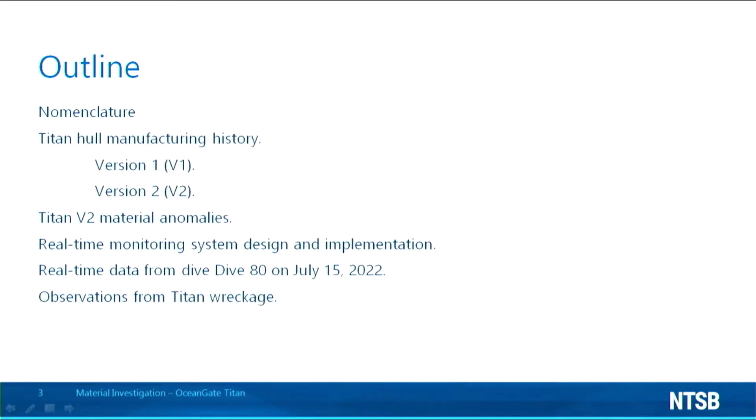Today I'm going to present some results of the materials group investigation into the implosion of the OceanGate submersible Titan. After some nomenclature, the presentation will be broadly divided into two parts. In the first part, I will describe what we have learned about the construction of the Titan's composite hull and the implementation of its real-time monitoring system.

I'll briefly discuss the version 1 hull, then move on to the second, or V2 hull. This hull was manufactured using a multi-step co-bonding process that was different than the V1 hull in that it contains multiple adhesive bonded joints. We were able to examine some material from the manufacturing of the V2 hull, and found several anomalies within the composite and the adhesive joints, including waviness, wrinkles, porosity, and voids. I'll show examples of those as well as some features consistent with rubbing damage at one of those adhesive joints.

Next, I'll recap the Titan's real-time monitoring system. I'll talk briefly about the principles behind these methods and review how OceanGate implemented them on Titan.

The second part of my presentation will focus on changes in the mechanical response of the hull following dive 80, and observations gathered from images of the wreckage on the ocean floor. I'll show that the Titan's real-time monitoring system detected the loud bang that we've heard about previously, and that the strain response of the hull changed on subsequent dives after the bang.

I'll finish with some images from the Titan wreckage. These will show that the composite hull experienced substantial delaminations at or adjacent to two of the hull's co-bonded joints.

Here's an example of a pre-preg splitting operation. This is a comparatively small machine and would probably not have been sufficient for the amount of fiber that OceanGate needed for Titan, but it illustrates the idea of splitting.

A rolled up sheet of prepreg is loaded into the machine and is sent through a series of cutters, producing a large number of tapes or tows. The tows are then rewound onto individual spools. One of these individual tows could contain thousands or even tens of thousands of individual carbon fibers, depending on its width and thickness.

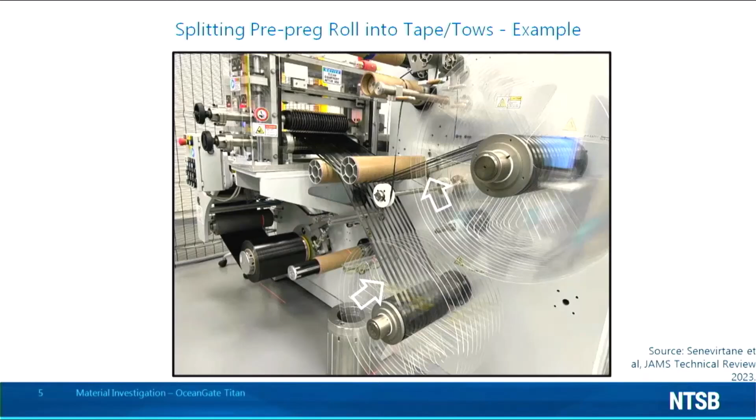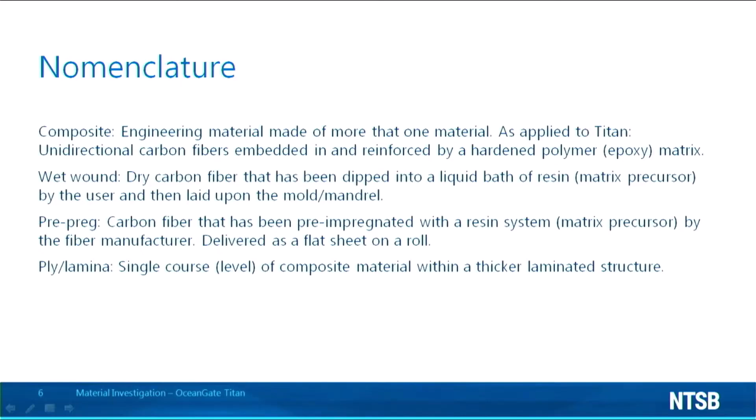The prepreg tapes that we saw in the previous slide are clearly very thin, so objects built up using layers and layers of these tapes will have a laminated structure. One course or level of unidirectional material is a ply or lamina.

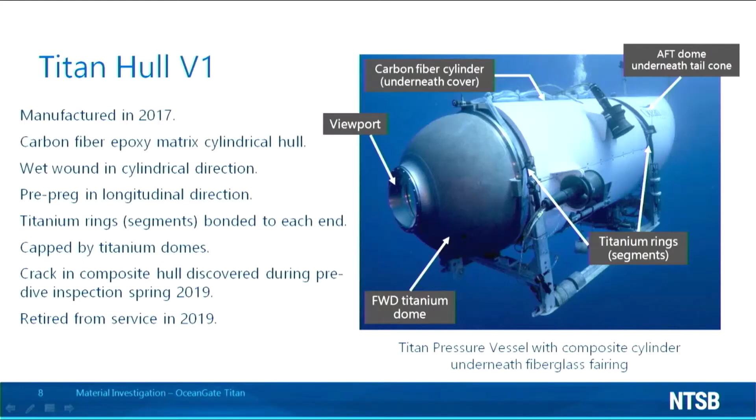I'll now discuss the manufacturing of Titan's composite hull. The Titan V1 cylindrical composite hull was manufactured in 2017 and was at the core of the Titan pressure vessel. The hull was manufactured using a combination of wet wound fiber for the circumferential plies and prepreg for the longitudinal plies.

The ends of the cylindrical hull were capped by titanium rings called segments that were glued to each end. The segments in turn were mated to hemispherical titanium domes that were bolted on at either end, and the forward dome contained the affordance for the viewport. As previously noted, a crack was discovered in the composite hull and it was retired from service in 2019.

Oh, too loud. Okay, all right.

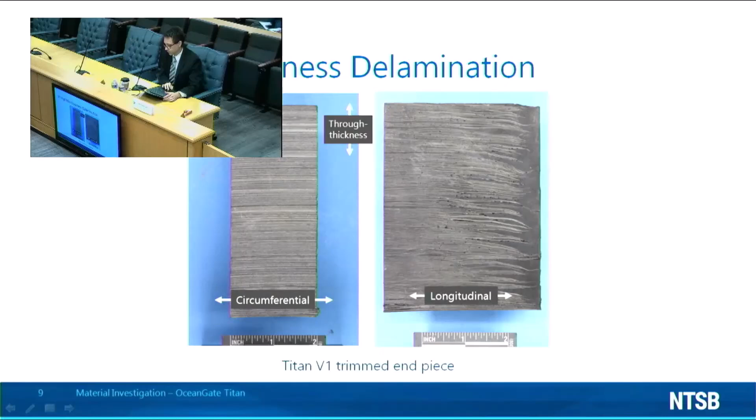Investigators had the opportunity to examine a leftover piece of the Titan V1 hull. The hull was originally manufactured with excess material at both ends, and then trimmed to size. The leftover piece was trimmed excess material from one of those ends.

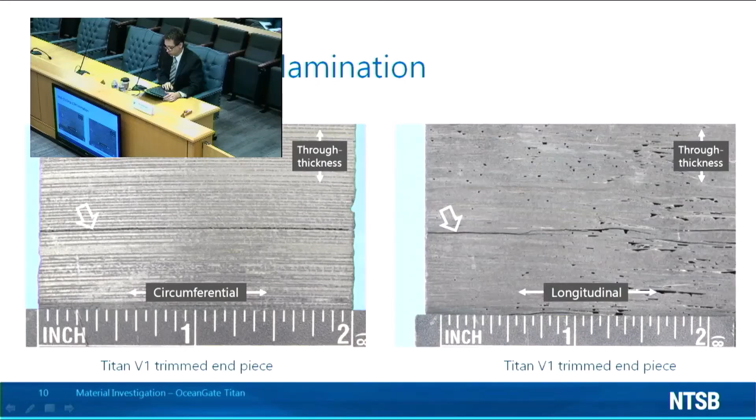The piece contained voids and delaminations. One notable delamination was located about mid-thickness and is shown from different directions in these two images, as indicated by the white arrows.

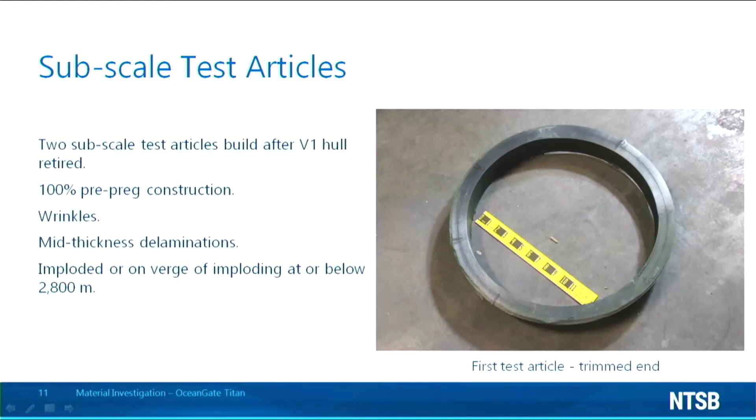After OceanGate retired the V1 hull, they manufactured two 1/3 scale test articles. Just like the Titan V1 hull, those cylinders were manufactured with extra material on both ends, and then trimmed to size. One of those trimmed end pieces is shown in this image, and in greater detail in these images.

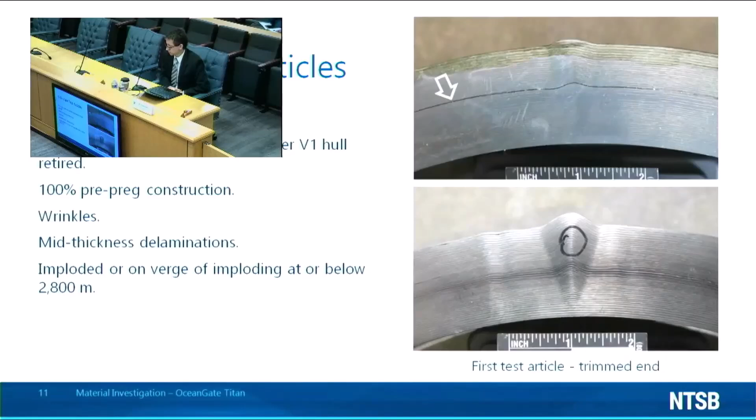The trimmed end piece contained two notable wrinkles and a mid-thickness delamination, as indicated by the arrow in the upper image. According to multiple former directors of engineering for OceanGate, both subscale test articles imploded, or were on the verge of imploding, at or below 2,800 meters.

OceanGate identified these wrinkles as a likely cause of the low implosion pressure. In order to mitigate the wrinkle problem, OceanGate pursued a co-bonding process, which I'll describe in a couple of slides.

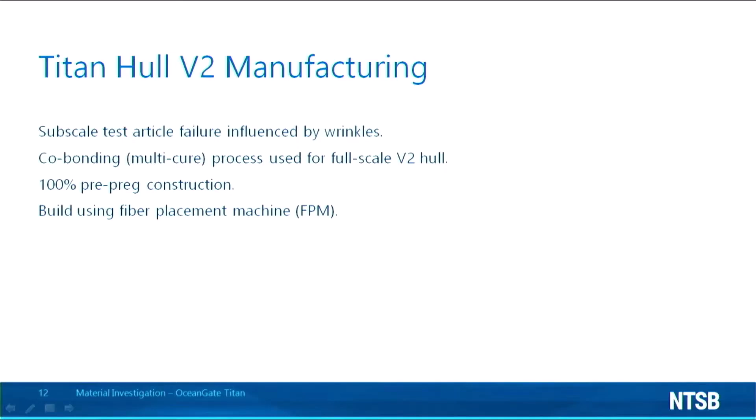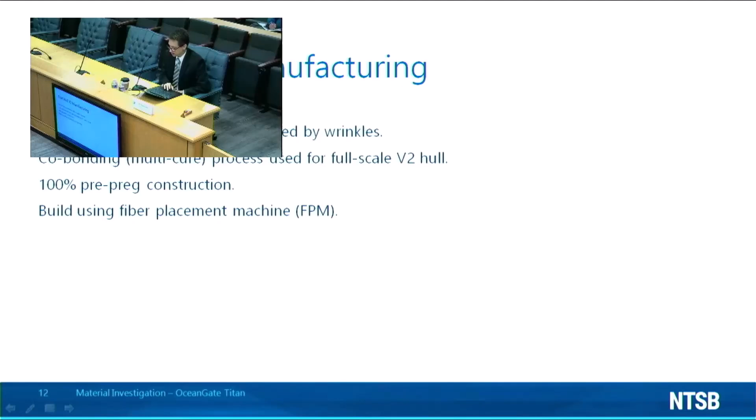After building a couple of test rings to test the viability of the co-bonding process, OceanGate proceeded with building a full-scale version 2 hull for Titan.

The full-scale V2 hull was manufactured by automatic fiber placement. This is a robotic system that, in this case, was probably attached to an overhead rail and trolley system, and contained multiple spools of prepreg tape loaded into a fiber placement head. The head can apply multiple tapes in multiple directions.

For the first two plies, the tapes were applied in the circumferential direction, like a spiral from one end of the hull to the other. For the third ply, the tapes were applied in the longitudinal direction. The sequence was then repeated until 133 plies, approximately 1 inch of prepreg material, had been applied to the hull.

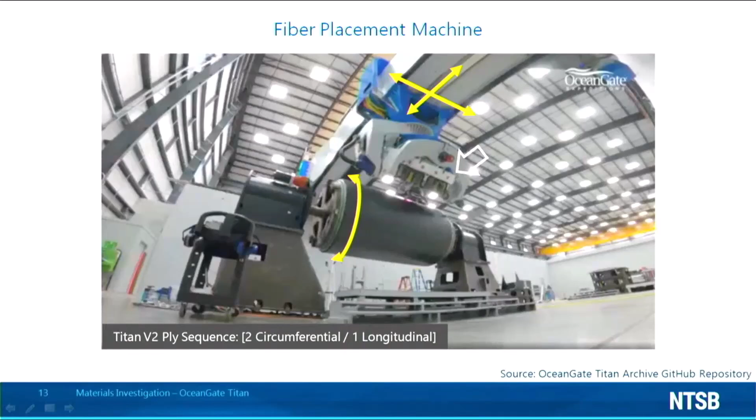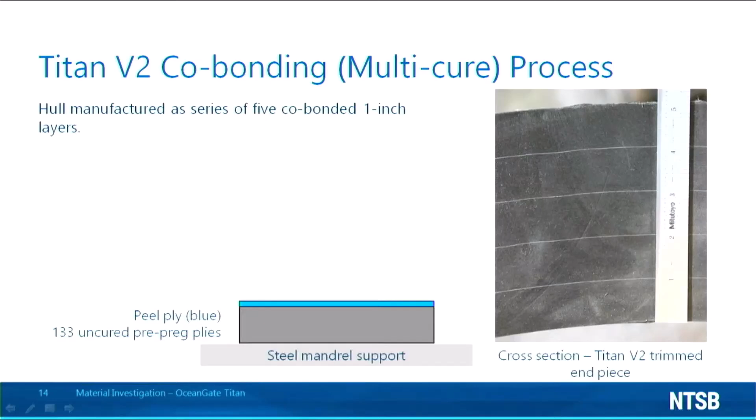The hull then proceeded to curing and co-bonding. The co-bonding process, or multi-cure process, as it was sometimes referred to by OceanGate, involved building up the composite hull in 1-inch layer increments. After the first inch of prepreg was applied, the layer was capped by a peel ply, a plain woven synthetic fabric designed to be removed later.

The assembly was then cured at elevated temperature and pressure in an autoclave. After curing, the peel ply was stripped from the surface. The act of stripping the peel ply is intended to create an active surface for adhesive bonding. After peel ply removal, bulges in the hull were removed by grinding.

A layer of film adhesive was applied, followed by another inch of prepreg, capped once again by a peel ply. The assembly was once again sent to the autoclave for curing. This process was repeated until a nominally 5-inch thick hull was produced.

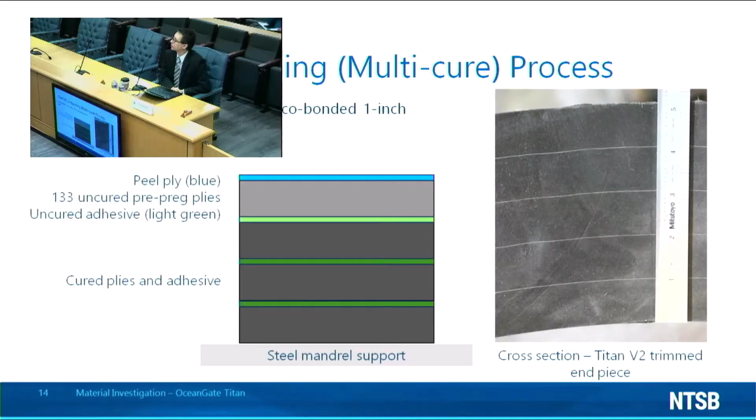The image on the right shows a cross-section through a trimmed end piece of the hull. The lighter lines spaced about an inch apart are the layers of film adhesive used to join the carbon fiber composite layers.

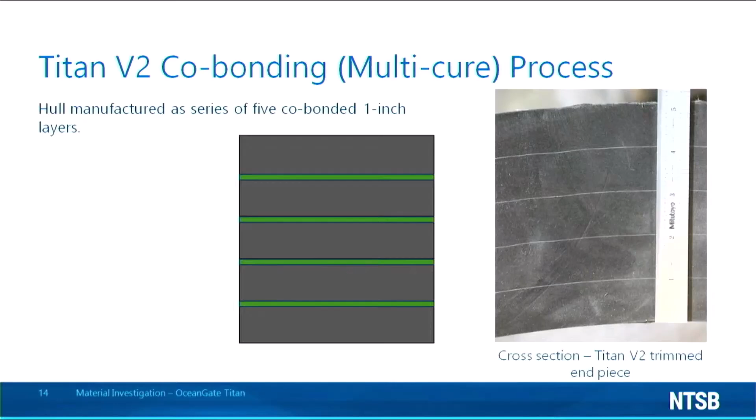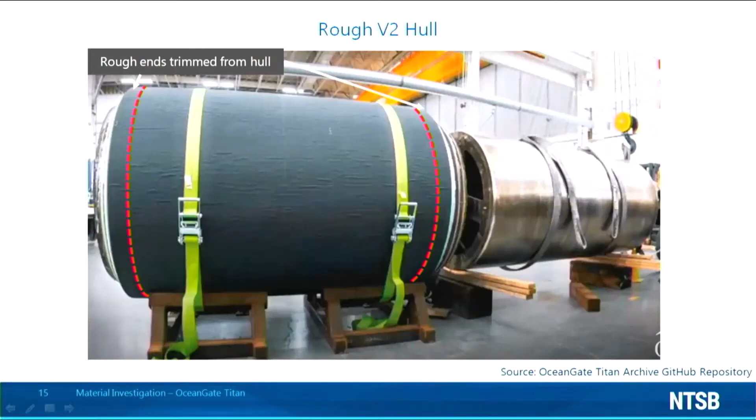This image shows the rough V2 hull upon completion. The rough hull was manufactured with excess material at either end, which was subsequently trimmed off.

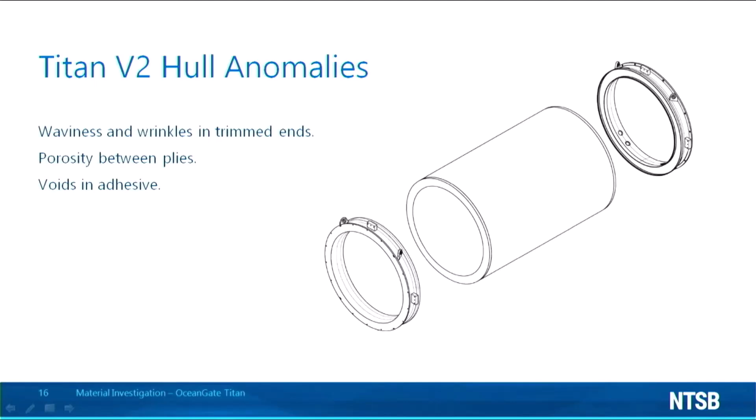The materials group examined trimmed end pieces and a recovered piece of the V2 hull, and found waviness, wrinkles, and porosity within the composite layers, and voids within the adhesive that joined the layers.

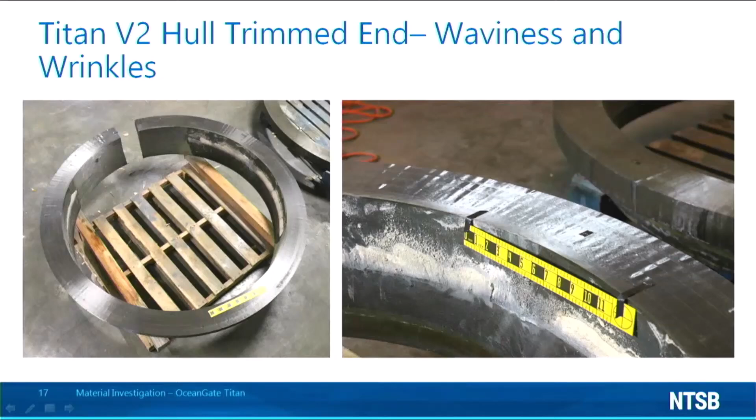The oblique lighting reflects off of the composite plies based on their orientation. The periodic light-dark reflections are an indication of the waviness of the layered structure.

A thorough examination of one of the trimmed ends indicated that the number of ground wrinkles increased with each successive layer, peaking at 24 for the 4th layer. No grinding was performed on layer 5, as it was the last layer.

It should be noted that the number of plies removed by grinding varied significantly. In a survey on a block of material brought back to the lab, the number of plies removed by grinding varied from 1 to 12.

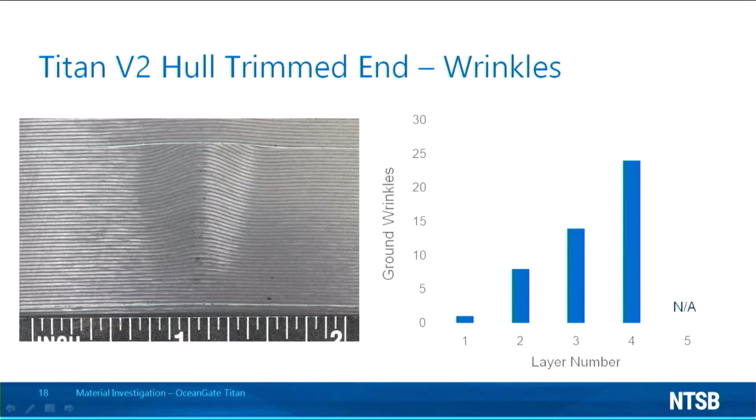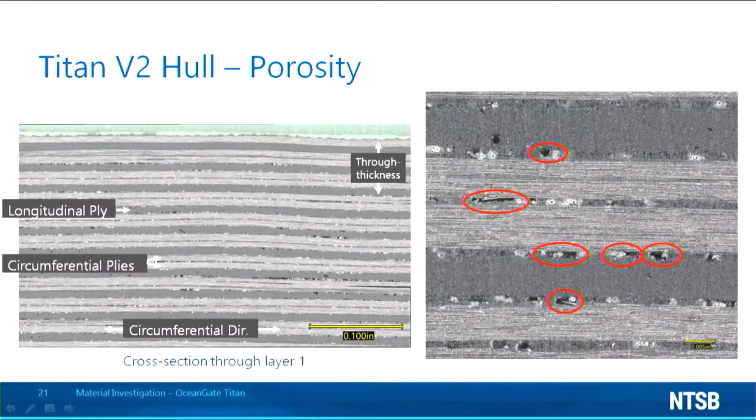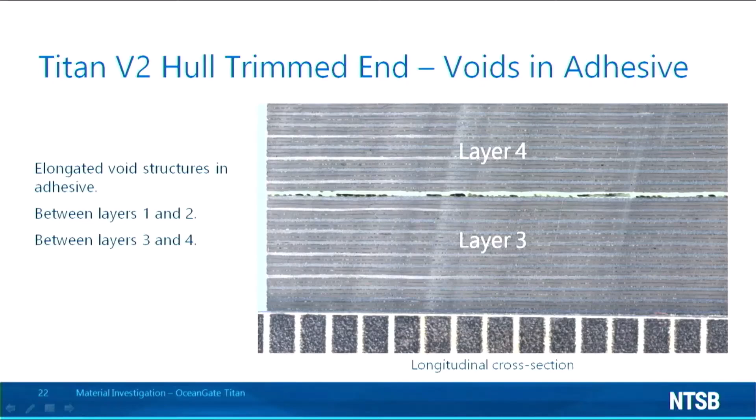Finally, investigators observed voids in the adhesive used to join the co-bonded layers. Some voids were present in all layers. However, at the interface between the 1st and 2nd layers and between the 3rd and 4th layers, some of the voids formed elongated structures in the adhesive. These structures were visible on longitudinal cross-sections like the one shown.

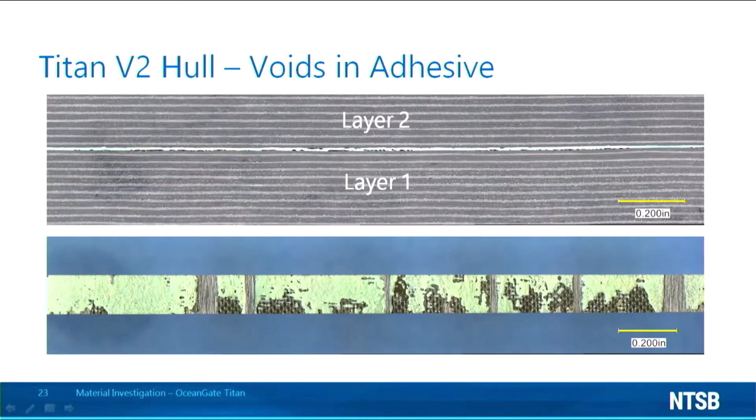Three distinct regions were seen on the fracture surface. The green regions are fractured adhesive. The vertical linear features are fractures through the carbon fiber composite. The checkerboard-like regions are thin layers of hardened epoxy that are above the carbon fiber composite but beneath the adhesive. The checkerboard patterns were left behind by the peel ply that was used during the curing process and then subsequently removed. The areas where you see this pattern were associated with the voids.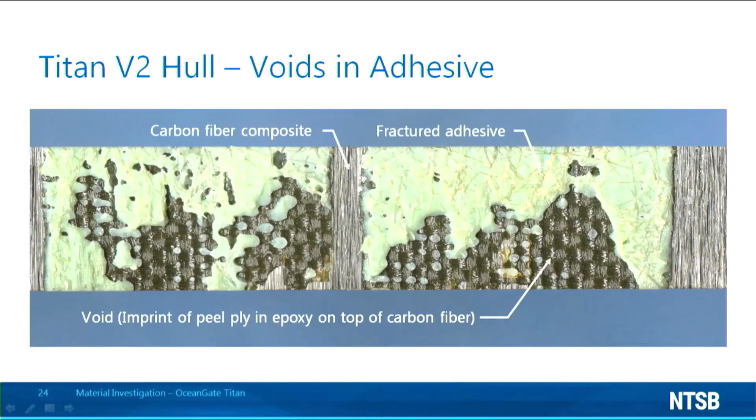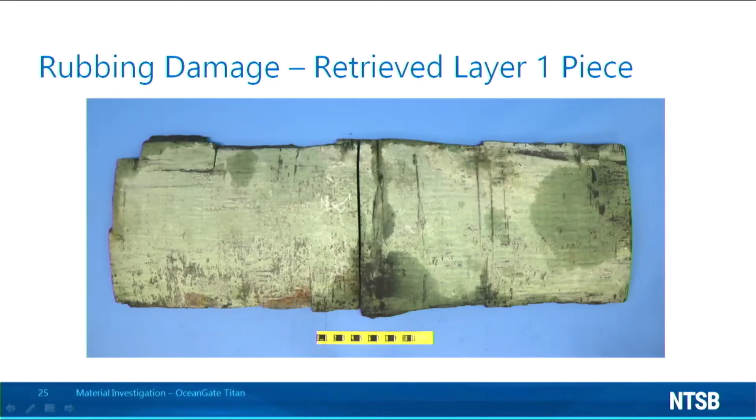Examination of the retrieved single-layer hull piece also revealed features that were consistent with rubbing damage on the adhesive surface. Voids were observed on the surface of the piece, like those observed on the trimmed end. As shown in the images above, some of these voids contained cream-colored debris that was readily removed with the tip of a fine blade and a synthetic bristle brush.

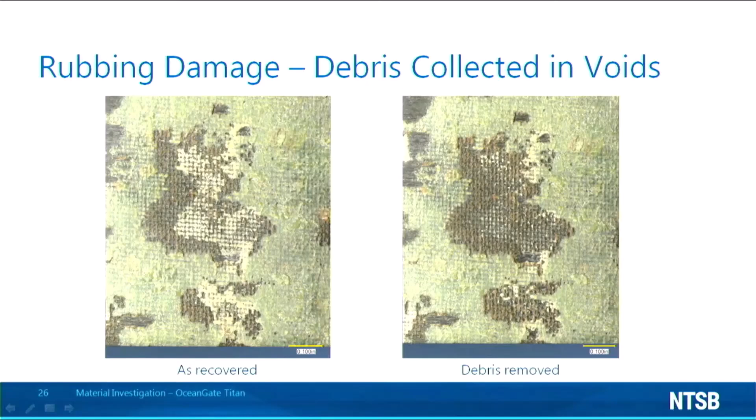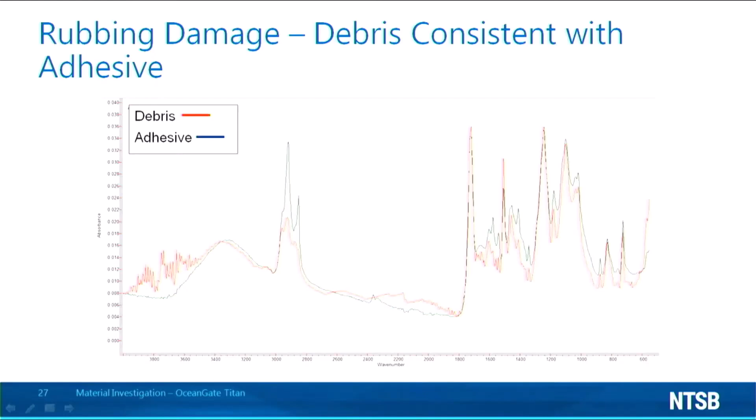Next, I'll discuss the components of Titan's real-time monitoring system. This system comprised two sensor types. The first type was acoustic event detection, and the second was the monitoring of mechanical strain or deformation. I'll start by discussing the acoustic monitoring system.

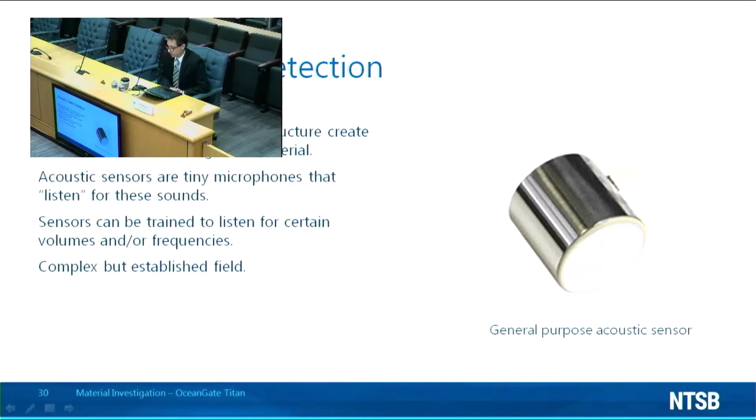The Titan's acoustic monitoring system functioned on the principle that fractures and other forms of material damage create sound waves. These sound waves can be detected using acoustic sensors. These sensors are just tiny microphones that can be affixed to a surface and trained to listen for sounds associated with breakdown of the material. This is a complex but established field of engineering.

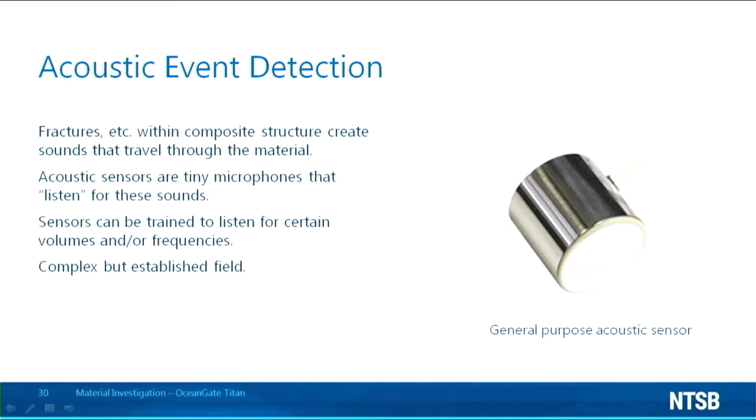The Titan's acoustic monitoring system comprised 8 sensors, with 7 attached to the inner surface of the hull and 1 attached to the inner surface of the aft titanium segment. On the hull, 2 were located at the forward end, 3 were in the middle, and 2 were at the aft end.

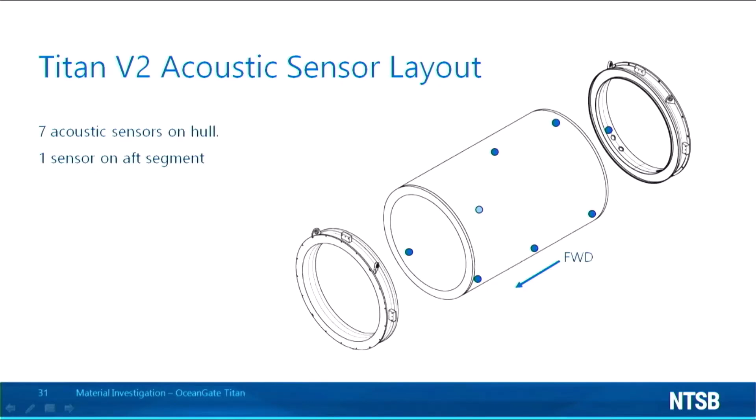The system listened for acoustic events that exceeded a predetermined amplitude, and when it detected one, it counted it as a hit and added it to a running tally of the total number of hits. There were 2 thresholds for the number of hits. The first threshold issued a yellow alert, and the second issued a red warning, at which point the dive was to be aborted. The amplitude and quantity of hits were established based on acoustic activity from the retired V1 hull and the subscale test articles.

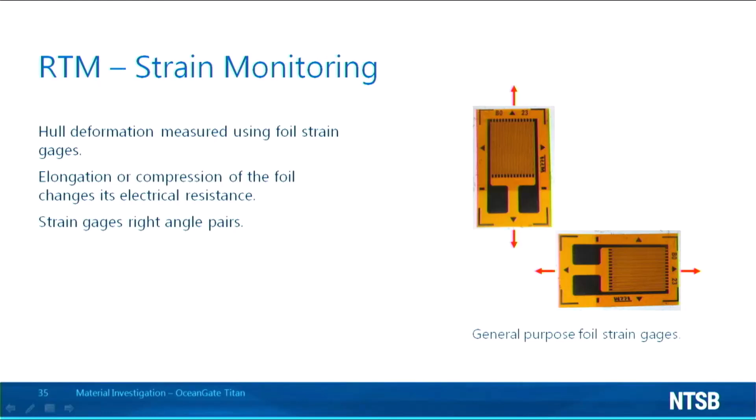There were 8 strain gauge pairs on Titan. 5 gauge pairs were located on the hull, and 1 pair was located on the aft segment. 2 gauge pairs were originally located on the forward dome during testing at the Deep Ocean Test Facility and may have been moved to other locations on the hull. As illustrated by the red arrows on the image, 1 gauge in the pair was aligned in the circumferential direction and measured hoop strain. The other gauge was aligned along the axis of the cylinder and measured longitudinal strain.

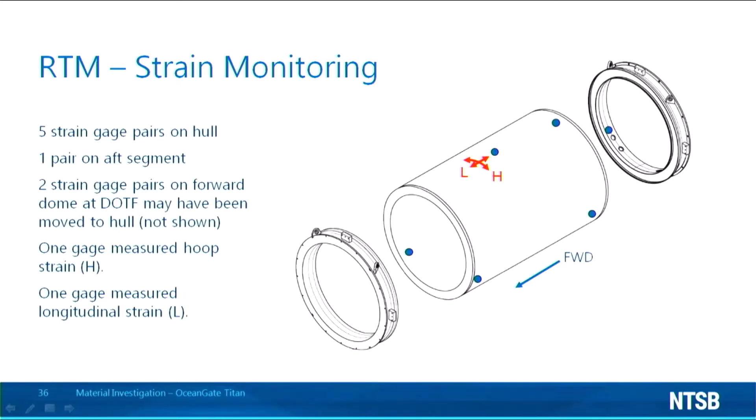On July 15th, 2022, Titan executed a dive to the Titanic, entered into the dive log as dive 80. Upon returning to the surface, the crew heard a loud bang, which was documented by the pilot in the OceanGate dive log and has been discussed at this hearing. This was the 14th dive to a notable depth for Titan V2 since initial deployment and the 6th notable dive of the 2022 expedition. The real-time monitoring system captured this loud bang, and it also captured changes in the hull's strain response after the bang.

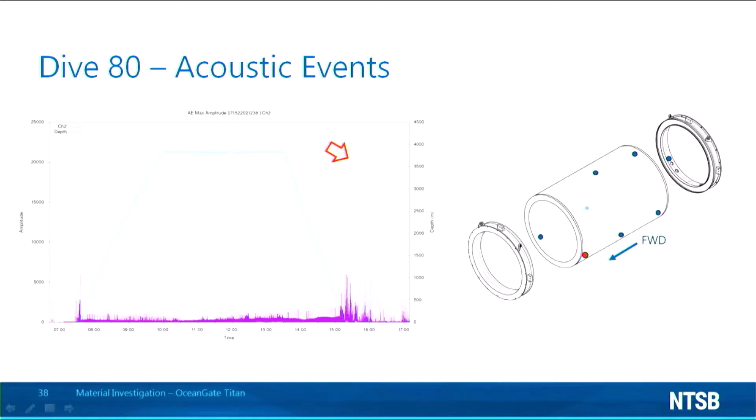The audible event was captured as indicated by the acoustic activity plot on the left. The sensor shown here was located at the forward port side of the hull. The horizontal axis displays time, and the vertical axis, again, displays both acoustic event amplitude and dive depth. The acoustic activity increased upon returning to the surface leading up to the event, which is indicated by the red arrow.

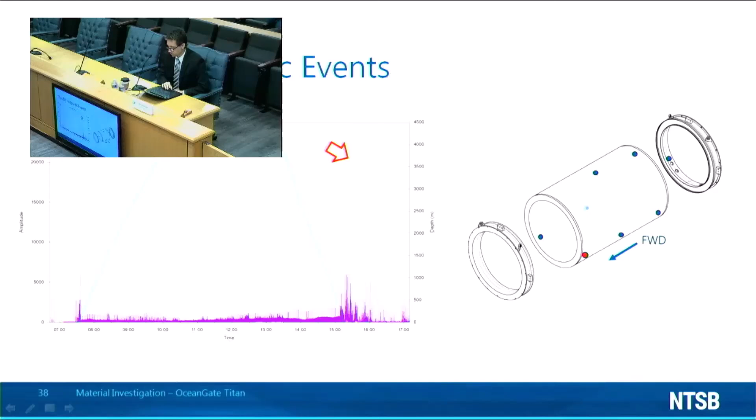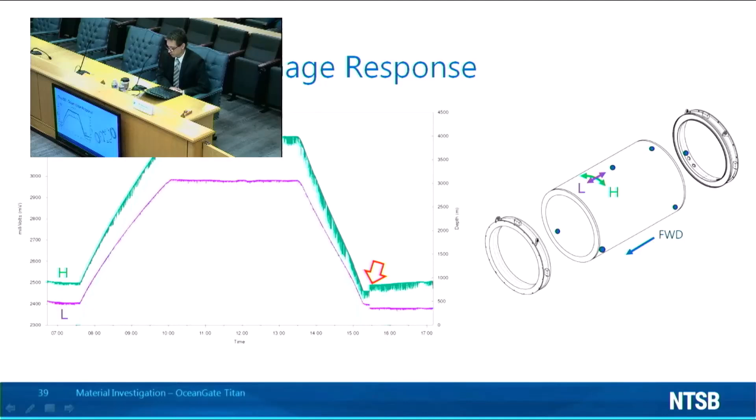Several strain gauges also responded to this event. The graph on the left shows the hoop and longitudinal strain responses during the dive for Group 4. As Titan descended, the gauge outputs increased in response to the external pressure as expected, and during the ascent, the output decreased as expected. Shortly after returning to the surface, the hoop and longitudinal gauges both showed a sudden shift in gauge output as indicated by the red arrow.

Lieutenant Steele, could we go back and try to get back on that page? It looks like it's not loading. Okay, well, we'll just have to proceed, unfortunately.

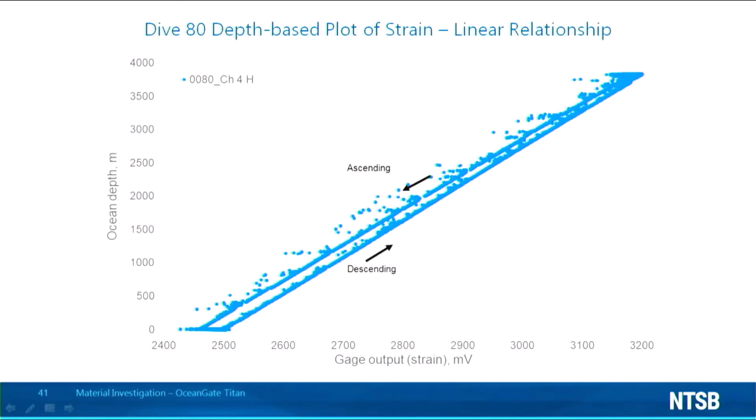All right, thank you. So,

Some of the gauges showed a change in strain response after dive 80. OceanGate strain data was typically, and perhaps always, plotted as a function of time. The changes in mechanical response are easier to visualize by plotting the strain against dive depth, as shown here for the hoop strain at gauge group 4. Plotting the data in this manner is more akin to a stress strain plot, which is a standard way of visualizing this type of data.

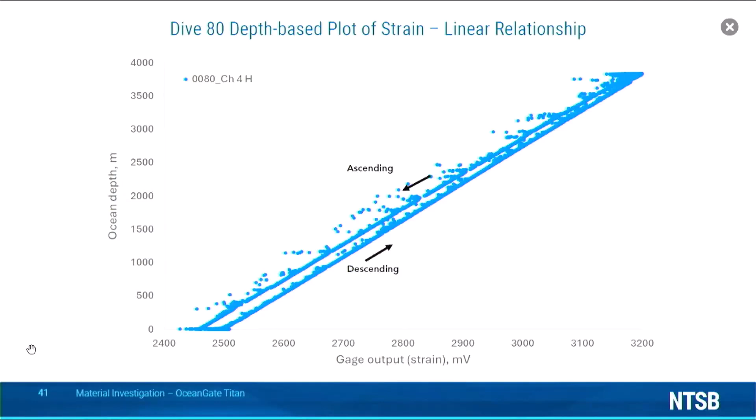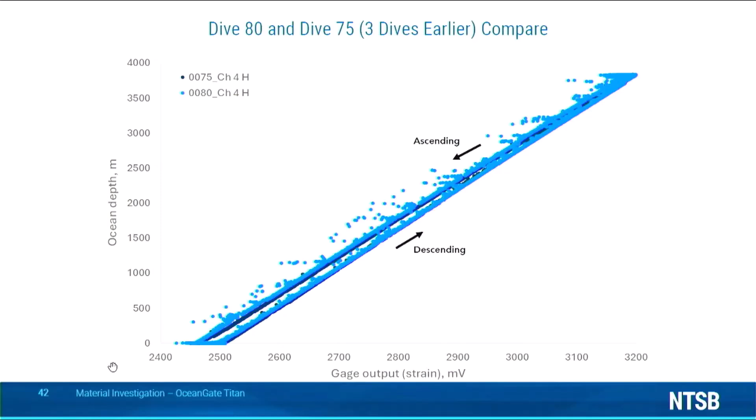For dive 80, prior to the event, the relationship between strain and dive depth was a straight line for both the descent and the ascent. Going backwards in time by 3 dives and comparing dive 80 to an earlier dive 75 reveals no significant change from dive to dive. Moving forward in time and looking at dive 81, the dive immediately after the event, we see a change in the initial strain response of the hull.

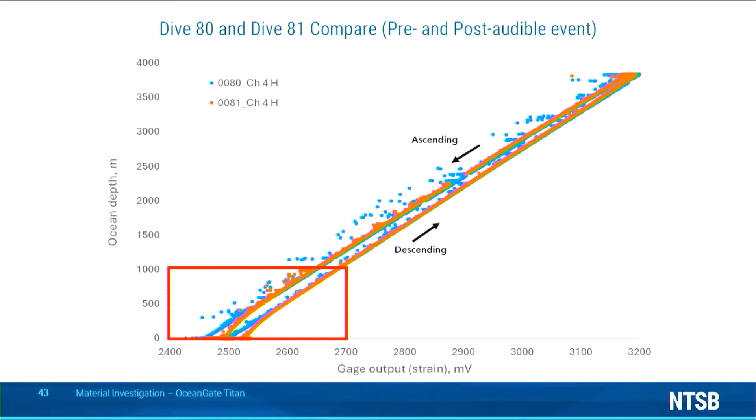Yeah, you can swap back over now.

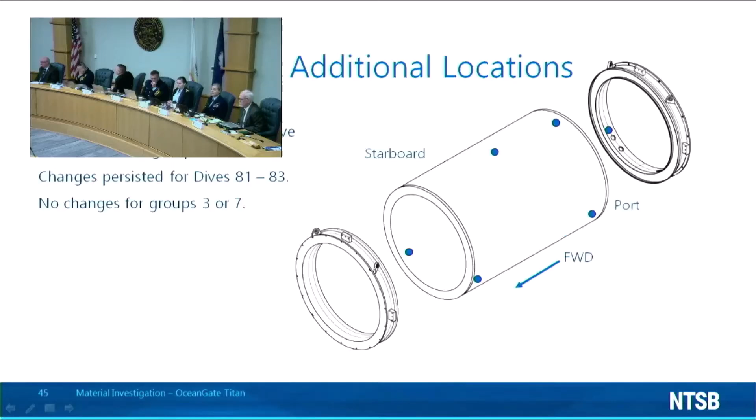So changes in strain response after dive 80 were also seen for the longitudinal strain for gauge group 5, and to a lesser extent for the hoop strain at gauge group 8. Those changes also persisted for dives 82 and 83. There were no apparent changes for groups 3 or 7.

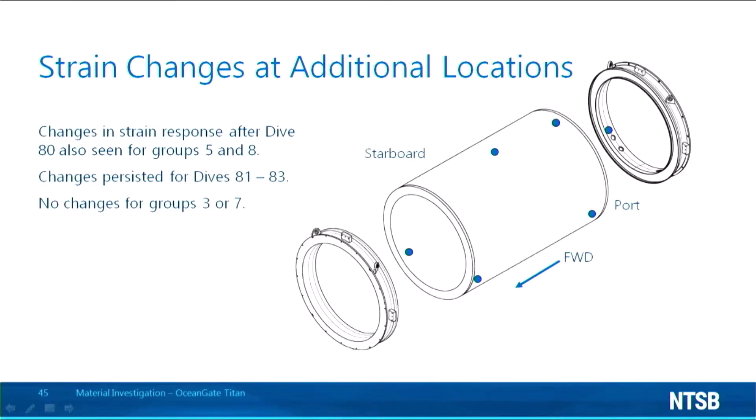Might not be able to do this. Perhaps we should switch over to the PDF version. Agreed, Lieutenant Steele, let's just stick with the PDF.

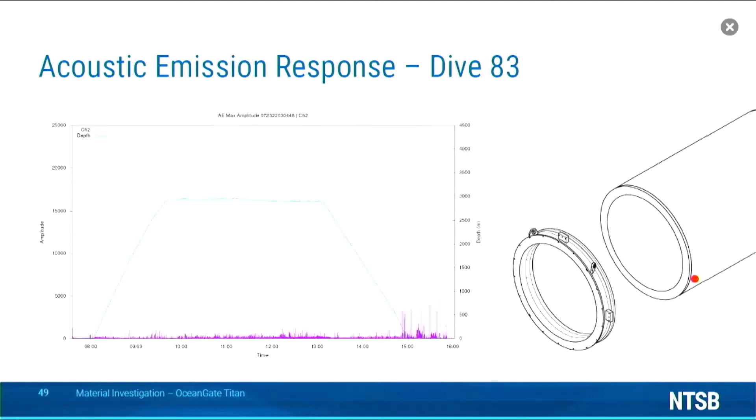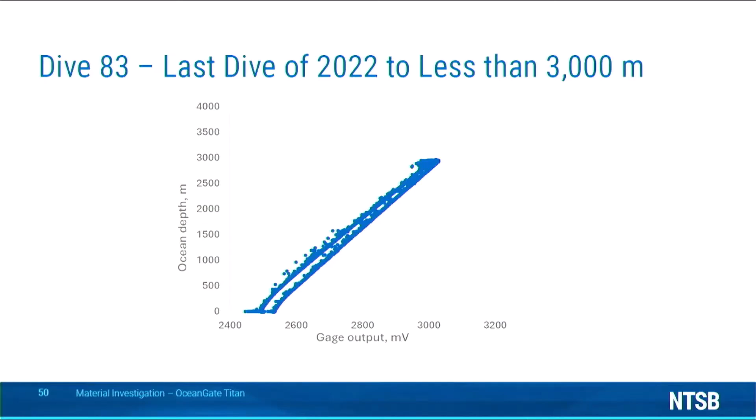Next slide, and here for dive 83. One note about dive 83: this dive did not take place at the Titanic wreck site and did not go to the same depth as the other dives. According to the dive log, it reached a depth of 2,954 meters. This is the last dive for which acoustic emission and strain data is available.

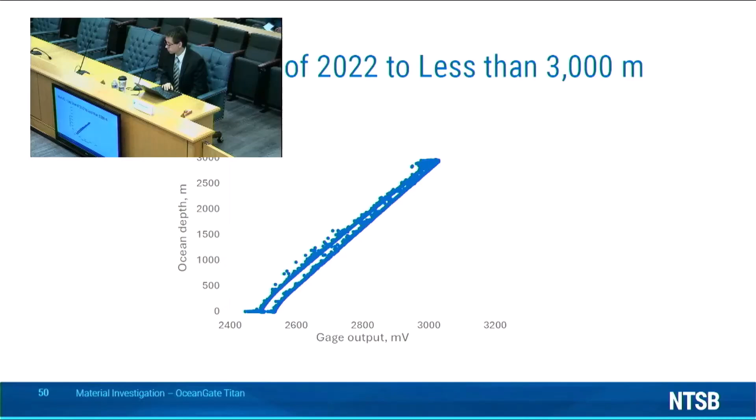For the final part of my presentation, I'll go over some images of the Titan wreckage, where we will see that the hull encountered a significant amount of delamination, the majority of it within or adjacent to co-bonded adhesive interfaces.

Here's another view of the main wreckage. From this view, two notable pieces of the wreckage are visible and indicated. One is the piece that extends nearly the entire length of the hull near the top, and the other is a piece on the port side, as indicated by the white outlines.

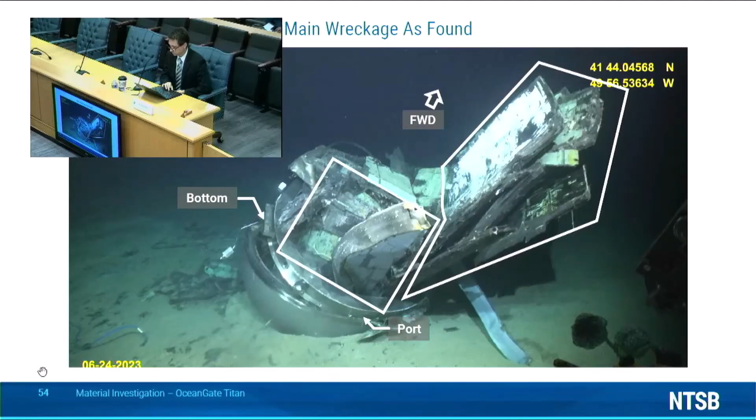The first shell consisted solely of layer 1. The second shell consisted of layers 2 and 3, and finally the outermost shell consisted of layers 4 and 5.

The delamination between the innermost shell and the middle shell—could you please go back, actually, to this side. I'll go ahead and give you a cue for next slide when I'm ready. Okay. No, I kind of lost where. Sorry, I lost where I was.

So the delamination between the innermost shell and the middle shell occurred within the adhesive at the layer 1, layer 2 interface for all the pieces that could be examined.

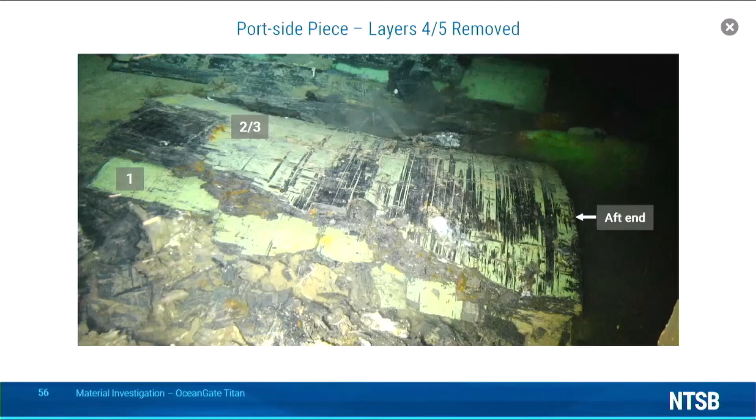Next, okay, good. Looking at this same piece, with the outer shell removed, we see that toward the aft end, there's a mixed region where some of the separation took place within the adhesive and some within the adjoining composite layer. At the forward end, there's also a square patch of composite material still attached to the surface.

Also of note for this piece, the outer shell consisting of layers 4 and 5 was fractured through the layers, and a chunk of it was missing, which is why the top surface of layer 3 is visible. These through-thickness fractures were not found in the middle shell.

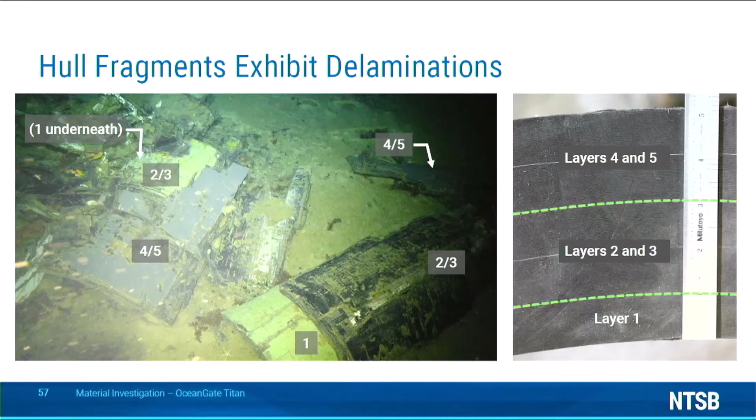From this point of view, the green adhesive at the bonded joint can be seen on the inside of the 4th layer. Delamination features were also observed on other pieces of the hull. Images and descriptions of those pieces are contained within the NTSB factual reports.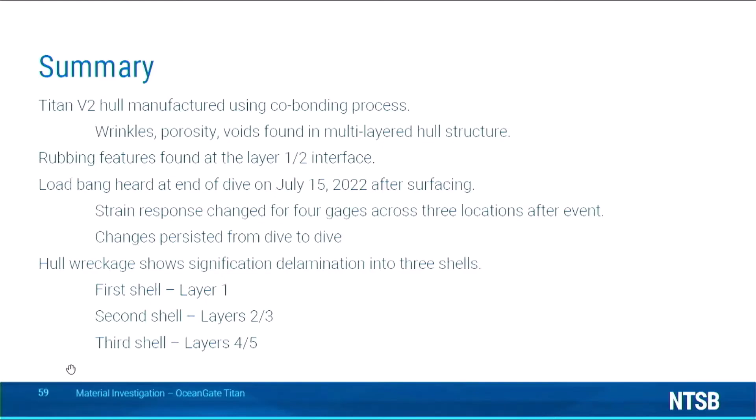So to summarize, the Titan V2 hull was manufactured from pre-preg unidirectional carbon fiber using a co-bonding process with multiple adhesive interfaces. Examination of the hull material revealed waviness, wrinkles, porosity, and voids within the multi-layered structure. A recovered piece of the hull exhibited features consistent with rubbing. Examination of strain gauge data after the dive 80 event showed a change in the mechanical response of the hull for 4 strain gauges across 3 locations of the hull. Those changes persisted from dive to dive. As just described, the composite hull showed significant delamination into 3 shells: a shell comprising layer 1, a shell comprising layers 2 and 3, and a shell comprising layers 4 and 5.

This brings me to the end of my prepared testimony. I would like to thank the Coast Guard for the opportunity to present these findings and would be happy to answer questions at this time.

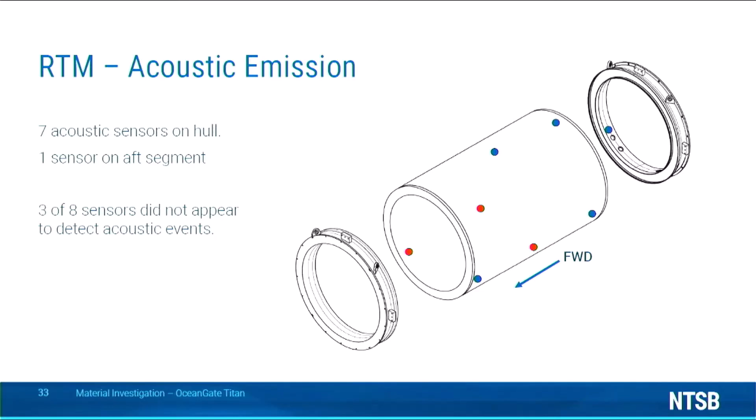Okay, so channel 2 would be right there, at the forward end of the hull on the port side. Channel 4 would be in the middle of the hull at the top. And, sorry, can you remind me again, what was the—In channel 7? Channel 7. I believe this is channel 7. I believe channel 7 is also on the top of the hull at the aft end.

We also noted from the real-time monitoring data that channel 6 and channel 8 had acoustic emissions, but they were not full scale. Can you show me where channel 6 and channel 8 are located on the diagram? Channel 6 would be on the aft titanium segment or ring, and channel 8 would be right here on the lower port side at the aft end of the hull.

Earlier we had discussed that the acoustic emission sensors 1, 3, and 5 had little to no activity. I wanted to confirm that AE sensors 1, 3, and 5 are the ones shown in red on your diagram. That is correct.

In your presentation, you noted that there was dust present in the peel ply impression between layers 1 and 2, which is slides 26 and 27 of your presentation. I wanted to confirm that the test you conducted showed that the dust was consistent with being the same material as the adhesive layer. What slide was that? Slides 26 and 27.

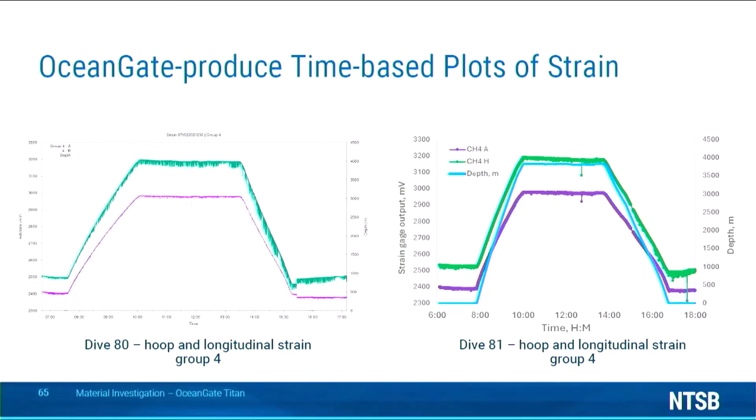This slide shows the hoop and longitudinal strain gauge output for Group 4, for dive 80 and dive 81. The graph on the left is the original OceanGate data as I received it. I did go ahead and replot it for dive 81 because, as Mr. Brooks testified, occasionally their plotting software would produce strange outputs, making it difficult to do a side-by-side comparison. But this is the type of data that, as far as we know, OceanGate was producing, and so these would have been the plots they would have been evaluating.

So I guess it's a matter of opinion as to whether one can discern the changes in strain output from these graphs. Thank you, that concludes my questions.

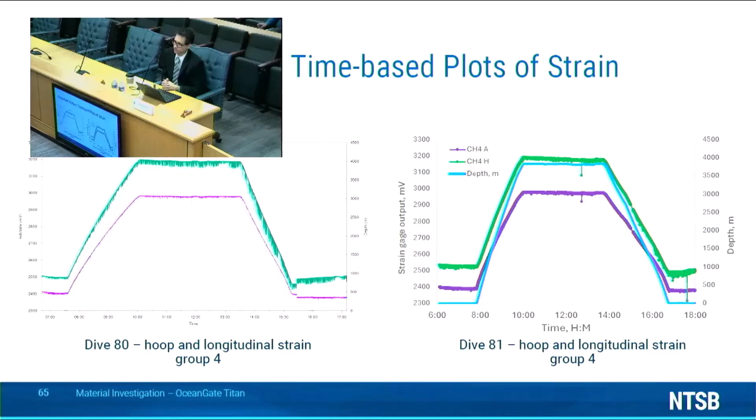Dr. Kramer, Lieutenant Commander Whalen has a question. Thank you, Dr. Kramer. When you measured the thickness of the version 2 hull, the number was approximately 5 point... it's somewhere between 5/32 and 3/16 above the nominal 5-inch thickness.

Did you do the same measurement on the version 1 hull? I did do a thickness measurement on the version 1 hull. And what was that? It was like 4.97, slightly below 5 inches.

Lieutenant Steele, can you bring that up? I do have a slide where I have a visual comparison of those two. That's slide 63.

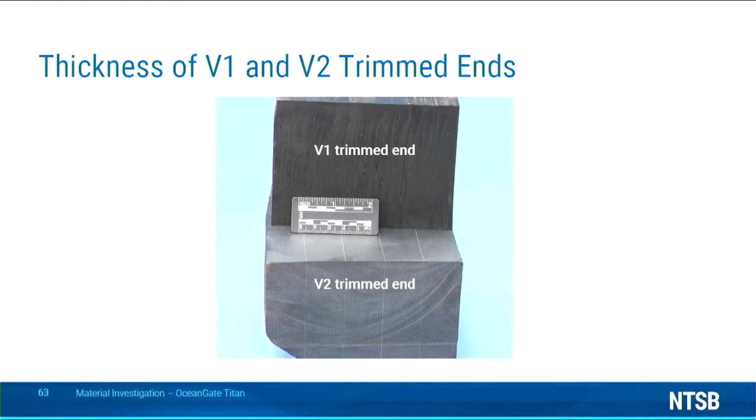This slide here shows a piece of the version 1 and a piece of the version 2 trimmed ends stacked on top of one another, so you can visually see the difference in the thickness of the two hulls.

And that would have been the area of the carbon fiber, not specific to these two as they're trimmed ends, but the width of the carbon fiber visualized here is the same as would be on the trimmed off end, which went into the clevis of the titanium ring. That is correct.

And in fact, we did have a chance to examine the outermost shell, layers 4 and 5 of that very long piece, and we were able to see that the outside of that layer had material removed from it, presumably to bring the thickness down to the level where it could be inserted into the titanium ring. And they were the same titanium rings used on version 1 and version 2? That's correct, that's my understanding.

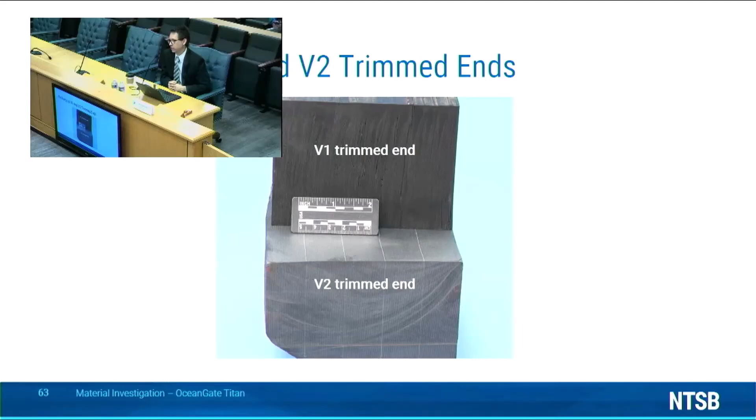That's all the questions I have, sir. Thank you.

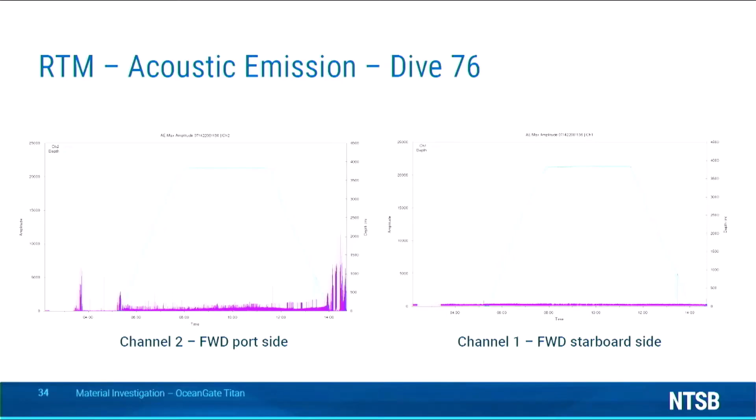Lieutenant Steele, can you bring up slide 34, please? Dr. Kramer, I'm going back to the acoustic emission data from Dive 76. This question comes down to trying to figure out if the acoustic sensors were inoperable or just hearing less noise prior to Dive 80. We had previous testimony that this lesser acoustics could be due to a scaling issue from the different graphs, and that's what I want to ask you, sir.

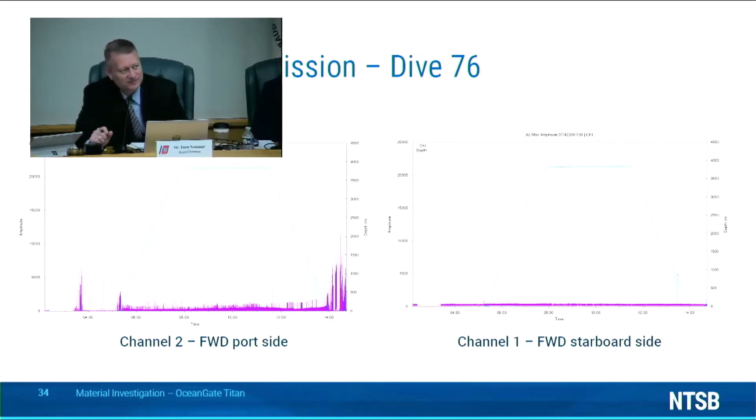Looking at this, is the potential for channel 1 to be a scaling issue? Are these the same scales? Well, these two plots are the same scale.

So in your opinion, is it likely that the other acoustic sensor is either highly degraded or inoperable? I don't think that I'm in a position to answer that question.

For Dive 80, did you see any indications of an acoustic reading on channel 1 for the loud bang? I think it's fair to say that for any dive we examined in 2022, on channels 1, 3, and 5, we did not see any indications of notable acoustic events.

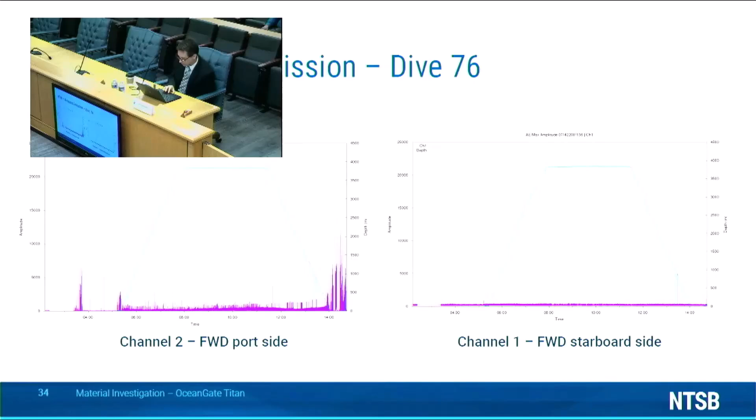There were, as you see on this slide, the right graph, the forward starboard sensor, occasional blips like the one you see, but in general they do not show the same type of acoustic characteristic that the other sensors show.

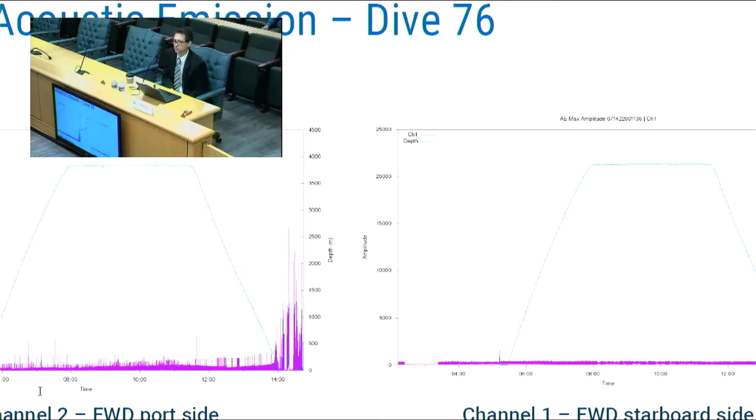And sir, now I'd like to talk about the sanding to fair the hull after each 1-inch layer was applied. Do you know if that sanding was done on carbon fiber layers that were longitudinal or cross-sectional?

Well, for any sanding event that went 3 layers down or more, it would have sanded into both circumferential and longitudinal layers, because the repeating stack is 2 plies circumferential, 1 ply longitudinal, repeated until the desired thickness is achieved. If it's a single layer that's been sanded into, it would depend on which interface it is, because the orientation of the topmost ply changes from interface to interface.

And was there a consistent topmost ply? No, because the number of plies was 133, and since that's not evenly divisible by 3, it sort of cycles through the possible top layers, essentially.

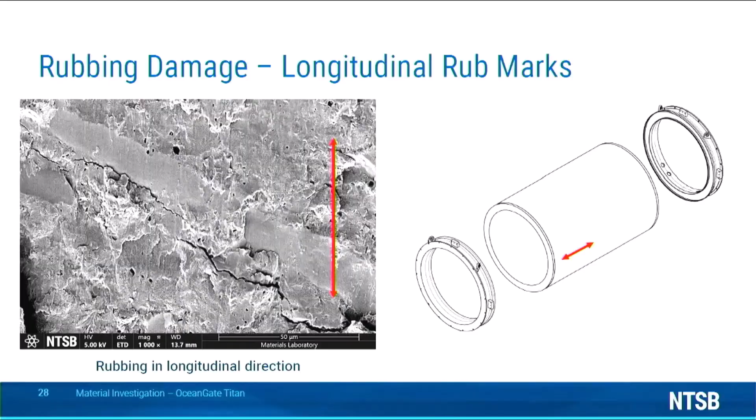Lieutenant Steele, can you call up the slide for dive 80, please? What number is that, sir? It's slide 38. I'm sorry, actually slide 39 is the strain gauge response for dive 80.